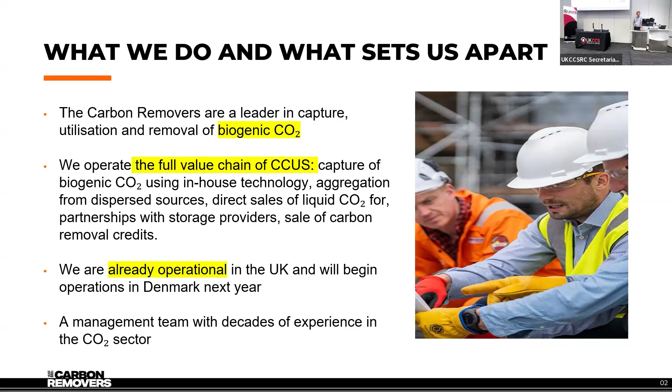Why biogenic CO2 and why only biogenic CO2? Ultimately the distinction is fossil CO2 is an annoying waste product that is taxed or ETS'd, and you have to effectively pay to get rid of. Whereas biogenic CO2, you can make money on either by monetizing the effect that once you've stored it permanently, you can issue a carbon removal credit on the back of the CO2 molecule, or you can use it as a feedstock.

Now we just make feedstocks for dry ice production or for food and beverage companies. But in the future, there will be e-fuels, synthetic fuels, power to X, whatever you call these projects, that also need biogenic CO2 as a feedstock. And I said we only capture from fermentation sources, so only from biomethane or from whiskey distilleries. In theory, the same tech would apply to wastewater treatment plants and to bioethanol. There is no large-scale bioethanol really in the UK, apart from one Nippon Gases plant.

But ultimately, why we focus on this segment boils down to what Jeremy said in the earlier session, thermodynamics rule. What we have to make in order to be able to sell it is 99.9% pure CO2, trace pollutant levels in it, liquid, so minus 20 Celsius plus 17 bar. If we can start with higher purity sources, we spend less money getting the CO2 to that end state.

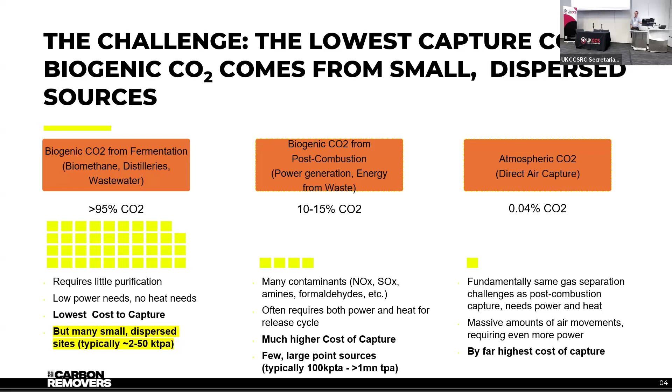So they all just have a pipeline put by some pipeline operator to them. The sources we work with don't have that. So in order to make those sources accessible, you have to physically truck the CO2 from the small sources to your aggregation point. And obviously we do this because the difference in capture cost is so massive between post-combustion and fermentation that we can easily afford all this trucking logistics and the liquefaction and still do it cheaper than capturing more locally.

And then we put two of these isotanks next to one of these units, because one unit basically fills one isotank a day. And then we have a third isotank on a truck that shows up and picks up one isotank's worth of CO2 every day. And the reason why there's two next to each unit and not one is just that in most sites we can't pick up on Sundays. So we need to be able to fill two and then have the truck pick up twice on Monday.

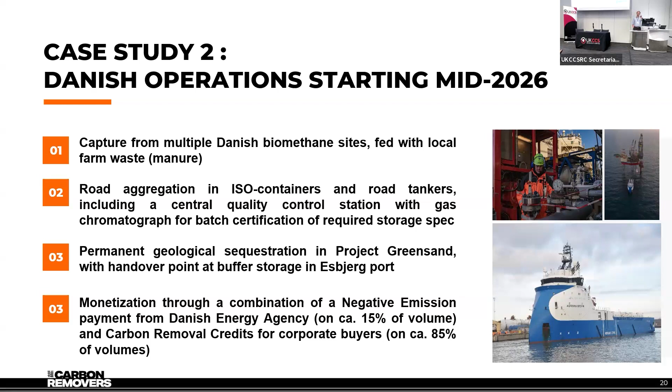So that's what we do in Denmark, starting probably between April and July '26, with 50,000 tons a year. And then the thing that we've learned in Denmark, which our business doesn't do, but we kept getting so many phone calls about it, that we're thinking there's probably a natural extension to our business in a few years there. Now, like I said in the beginning, fermentation CO2 is the lowest hanging fruit in terms of capture cost. But Europe, depending on how you do the maths, only has between 40 and 45 million tons of this fermentation CO2 budget.

Actually, it has less now. But if the EU meets its biomethane growth targets by 2030 and 2035, then the EU plus Britain as a whole would have around 45 million tons of biogenic fermentation CO2 spewed off the back of all this biomethane growth. But depending on what you think of national emission targets, greenhouse gas removal targets, synthetic fuel blending mandates, 45 million tons isn't enough. So Europe will run out of these lowest hanging fruits, and then the next lowest hanging fruits are the post-combustion volumes of BECCS plants or energy from waste.

And we've seen this in Denmark, that there's a lot of energy from waste and biomass district heating sites that are around 2, 3, 4, maybe 500,000 tons that just can't convince anyone to build a pipeline to them. If you're 2, 3, 400,000 tons of CO2, the national grid operator just will not build a pipeline to you, because they're busy building the pipelines to the million-ton stations. So we actually got a few phone calls that said, look, we will help you organize the train. We've worked out that our biomass district heating station is like a train a day effectively of ISO tanks.

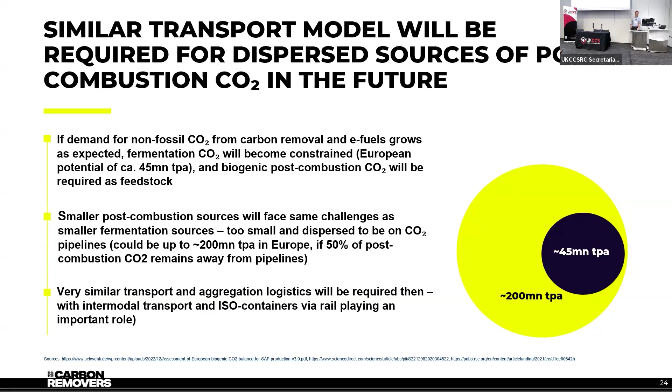We'll help you organize it, but can you just help us practically do this, rent the tanks, lease the tanks, fill the tanks, batch release the stuff, make it show up on time at the storage handover points, etc. We're a small business, we've never had time to do this, and those capture projects never have a business model because the subsidies aren't high enough to allow for the massive costs of post-combustion capture. But it feels like this model will probably play some role in that world too in 5 or 6 years' time, once the world has sorted out how to deal with these 45 million tons.

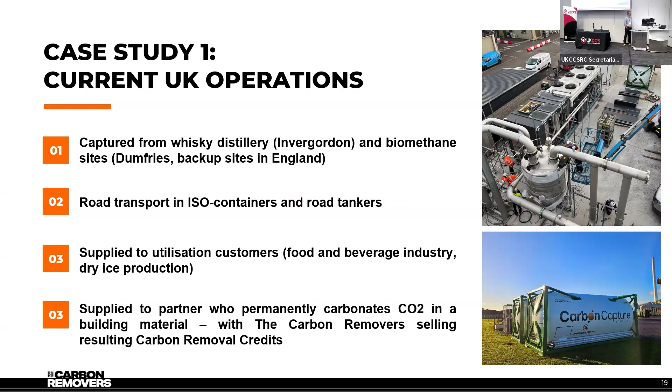Yeah, I'll go back to the very first slide, or to the second slide - ultimately the current utilization market, no one really knows how big it is in the UK. Every time we raise funds, our investors ask us for a market study, and there is none.

About how much utilization CO2 is used - everyone's best guess seems to be around 1 million tons in the UK, probably a bit less. That gives you an idea of what the UK does, and other countries in Europe are similar, just scaled up or down by GDP. So the only way this ever grows to 45 or 200 or any number much bigger than 1 million for the UK is if either of these things grows.

So either people pay for negative emission, greenhouse gas removals, whatever you call it, or people pay for synthetic fuels based on non-fossil CO2 feedstocks. And those two things will only happen if there are compliance schemes that force people doing either of these things. We sell voluntary carbon removal credits, but at a scale of thousands, or maybe tens of thousands per transaction cumulatively over the contract period. So the voluntary market isn't going to get to millions in either of these things.

Yeah, so we have to be patient until the compliance stuff kicks in.

Thank you, and sorry, one other question on the midstream side of things. Do you see any issues with there not being enough supply of things like ISO tanks, if there's lots of companies like yours looking at non-pipeline transport? I'm laughing because I also sit on the non-pipeline transport working group with some of your business colleagues, and there's a lot of industry people there who keep brainstorming about this problem - that there wouldn't be enough capacity and that they need business help to underwrite it, subsidize it, take the asset risk and all this stuff.

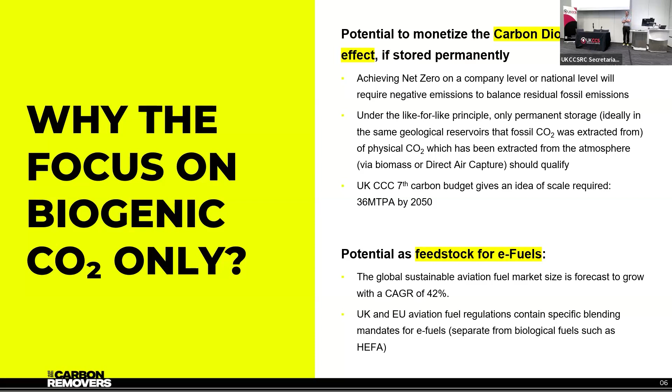I can be honest - what we've seen in Denmark is once some of these contracts were publicized, once we said we've signed storage contracts, once Vincent said we've signed 350,000 tons worth of storage contracts, within 2 weeks we had 3 local SMEs that are road hauliers calling up the contact form of our website saying, look, we are road hauliers, you need CO2 hauled, I'll buy the isotanks, I'll buy the road tankers. If you give me a contract - I think there's enough entrepreneurial spirit out there, especially in the haulage industry, that as soon as people are out there, there will be contracts.

I think if people know the isotank industry better than I do, at the volumes we need to buy isotanks, they're easily available, and to be honest they're not that difficult to make. Once someone wants 15,000 of these things, I'm sure manufacturing capacity will scale up. I think the Danish approach was basically the government just said, make this happen, gave people contracts to make it happen, and the value chain has sorted itself out at a small scale, which worked very well there.

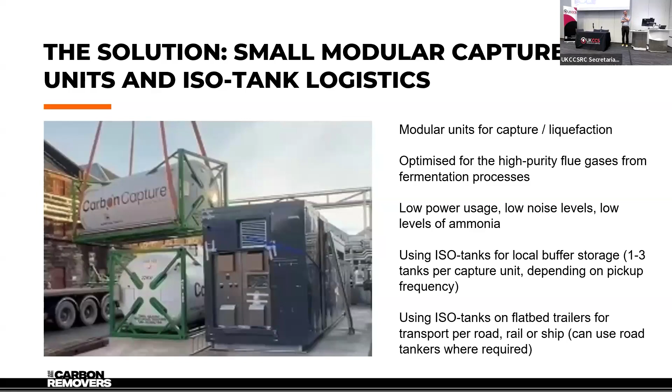So these are funded by the European Commission, about CO2 transport in industrial clusters. And the scope of this presentation first - I will give some very brief background on CO2 transport, most of which probably you are quite familiar with, but then I will move to the challenges and barriers to implementation of CO2 transport as a vital solution for carbon capture, utilization and storage, and then the solutions that we proposed to aid the implementation of CO2 transport in one of the clusters, followed by some summary and future recommendations.

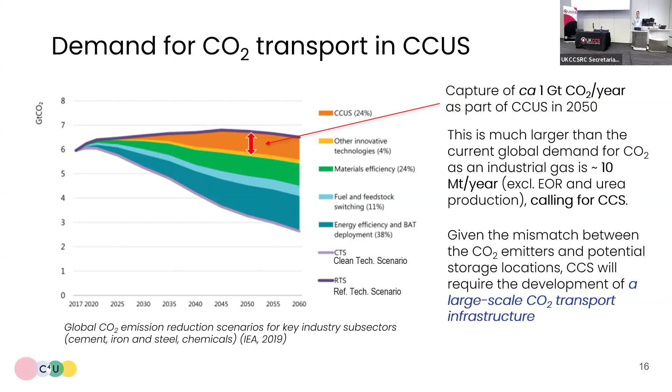So this is what we know quite well, the good, and obviously this is the challenge. Well, we need to have that transport, those transport solutions.

The good news is that CO2 transport is considered a mature technology, and we have several modes of CO2 transportation. These include pipelines or other mobile modes of transport using road transport, railway transport, ships and barges, and they all come with some advantages and disadvantages.

Some of them I have listed here based on the literature. Particularly, pipelines are considered the most suitable economic mode of transport of CO2 over long distances and large amounts, but they come at a high upfront capital cost. For small amounts, and depending on the availability of infrastructure in terms of roads or waterways, we can go for other modalities of transport.

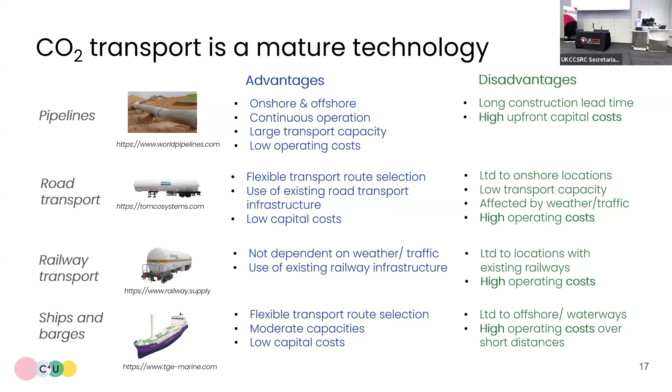They offer more flexibility, less upfront cost for implementation, but operating costs can be quite high, and we can compare the different modes depending on specific needs, amounts that need to be transported, and distances that CO2 needs to be transported.

Here basically comes the challenge: how to decide on the exact specific mode of transport, especially if we are talking about several emitters and several options where CO2 may need to be transported either for storage or for utilization.

How these transport modes' capacities can be estimated, or there is the economic side, and cost benefit analysis that needs to be done. Efficiency of the operation is another challenge.

There are, of course, safety risks that also need to be considered, given the safety issues with CO2 itself as an asphyxiant, and also some impurities that can be detrimental to CO2 transport facilities, may cause corrosion issues, or can be hazardous on their own.

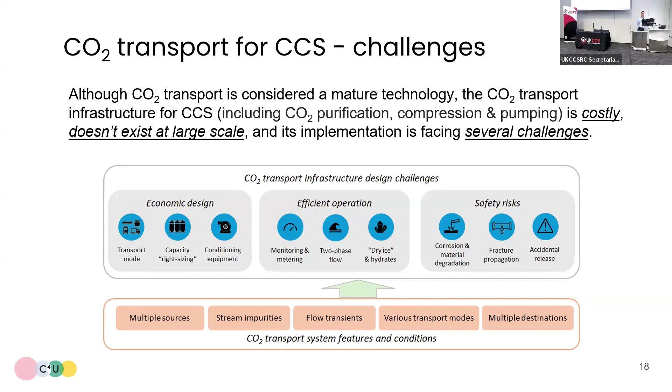Apart from these design, operation, and technical challenges, there are also other non-economic challenges posed by the environmental impacts, for example, of CO2 transport when it comes to using mobile modes of transport that operate on fossil fuels.

There are issues with potentially the policies and regulations when it comes to obtaining permits for transport, cross-border transport issues, resolving financial liabilities, long investment cycle for CCS projects, and uncertainties of the ownership of CO2 transport infrastructure.

There can be differences in the stakeholders' agenda when it comes to, for example, implementation of CCS in cluster regions, where the emitters would like to join at different times. They may wish to pull out at different times as well from the projects, and they may have their own decarbonization agenda when they implement other measures to reduce their carbon emissions.

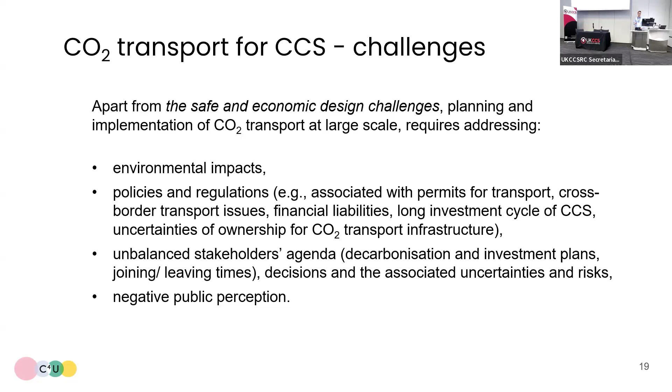And of course, the aspect of public perception. This can also be detrimental to the project if there is strong opposition to CO2 transport infrastructure implementation.

One of the solutions you're probably now aware of is reducing the cost by clustering CO2 emitters. This brings the benefits of reducing the cost, reducing the initial investments, and reducing the risks to the project implementation.

There are a number of such projects proposed in the UK. There is a project that we're working on in terms of the research infrastructure, in terms of the transport infrastructure research at the border of Netherlands and Belgium in the North Seaport.

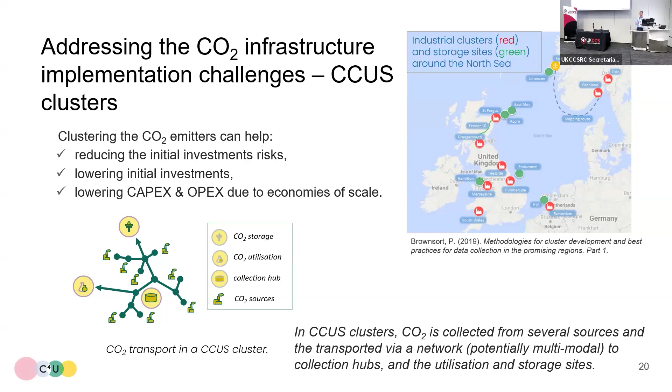In such clusters, CO2 transport facilities need to be decided and planned in terms of rollout over a number of years, and it can be applied to clusters or to larger regions.

There are several optimization problems that have been studied to address this infrastructure design. Typically, people looked in the past at the design of CO2 transport networks, pipeline networks, to connect several emitters and to transport CO2, for example, to geological storage. These studies were done around Europe and other regions around the world.

There are also studies where the cost-optimal modes of transport are investigated, for example, for CO2 transport chains, when you collect CO2 from a number of sources and transport it to dedicated storage using pipelines, trucks, railway, ships, and barges.

There are also studies where, apart from cost criteria, other criteria were included in the multi-criteria decision analysis to figure out what network configuration or transport infrastructure solution to go for. These can be safety considerations, for example, or environmental impact. So people have studied that as well.

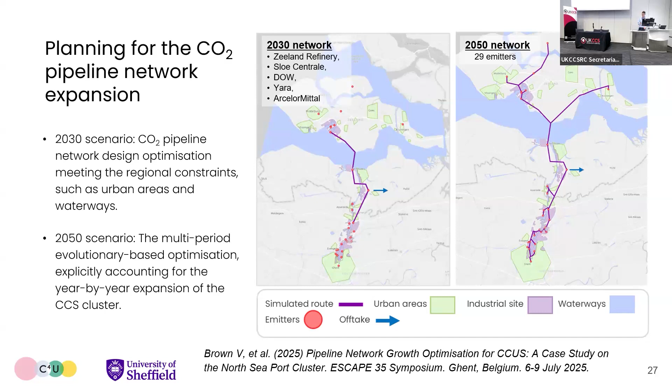And they have done that by explicitly taking into account the times when these emitters are planning to join. So assumptions were made, partially in consultation with industries, about when this may happen, and they have predicted what the evolved network configuration will be. So they have developed a really nice tool, which is close to commercial implementation really.

So in summary, I would just repeat that choosing the optimal CO2 transport solutions requires balancing costs against other criteria, and this could include geographical constraints, safety, societal acceptance, environmental impacts, and the speed of deployment.

And in our project, we have developed tools and methods that enable us to predict the infrastructure for CO2 transport, including right sizing of such a network, planning the future expansion of CO2 transport networks, and also we have the opportunity to do the multi-criteria optimization of such networks, including not only cost, but other criteria such as, for example, environmental impacts.

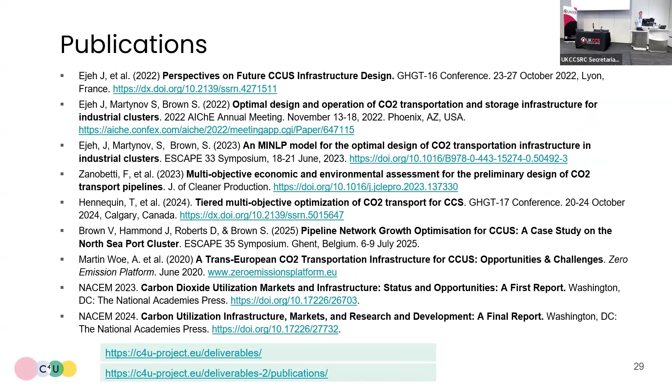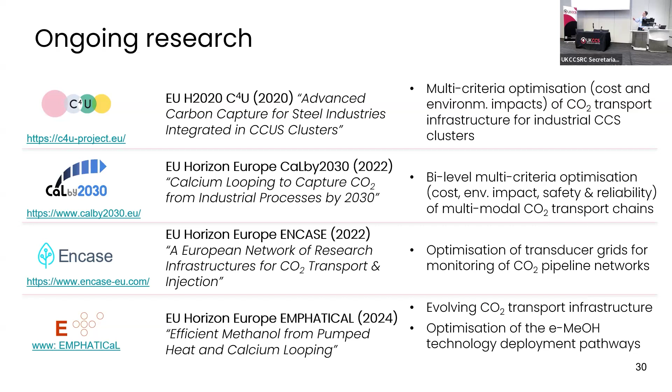We have produced a list of publications that you can access through these presentation slides, and we have several publications and deliverables made available through the project website, and we partially continue this work in several other projects, CaLby2030 project and ENCASE project, and there we look also at optimizing monitoring systems for CO2 transport networks, and also evolving CO2 transport infrastructure for producing green methanol in the EMPHATICAL project.

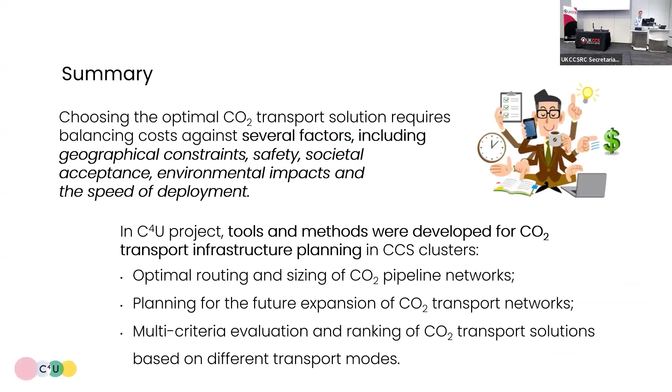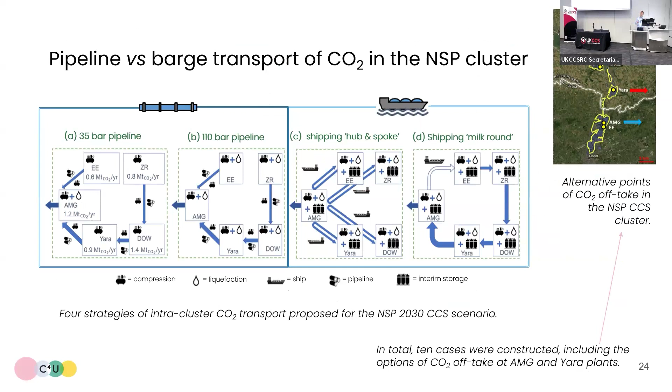Yes, I guess you're referring to this slide, is that right? This one. Yes. Here, for example, you just only have targeting 1.2 Mt CO2 per year for scenario A. Is it the same for all of them? Yeah, we have made the assumption that we are capturing exactly the same amount of CO2 from the emitters in the cluster. So that's cost analysis for all of them? Yes, we have done the cost analysis for all of them. Can you describe which ones can be implemented?

Yes, in terms of the cost analysis, for example, here we have the results for 8 scenarios, and we have pipeline scenarios as shown here for the 35 bar transport and for the 110 bar pipeline transport, with the offtake at 2 different alternative points, so that's why there are 2 here. And we've had shipping scenarios, so this included milk round and also hub and spoke, when you are transporting individually from the emitters to the dedicated collection point.

And in terms of the cost, we have the budgets for the cost in the top here. So there are CapEx and OpEx, and in fact, in this plot they're not really split as CapEx and OpEx. In the full paper, which was presented in the conference last year, you can find results for CapEx and OpEx, but here they are just

enumerated costs, but you can see the cost of liquefaction and compression contributing quite a lot, but the cost for the pipeline, the CapEx cost here, is relatively small, and the cost of shipping, that's the tonnage cost. Given the small distances, this cost is comparatively high to the pipeline cost in the project in that area. So it's a small distance, like a 30 kilometer span. So that's fine.

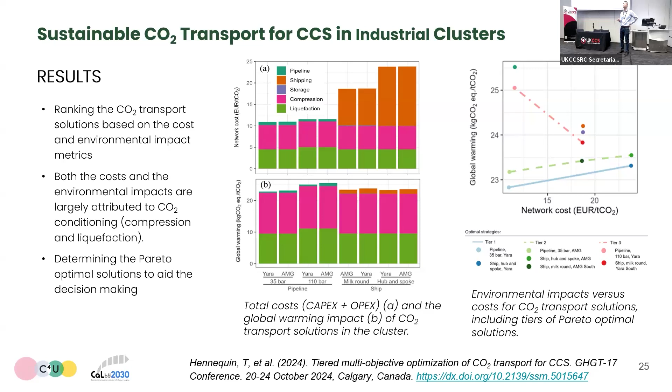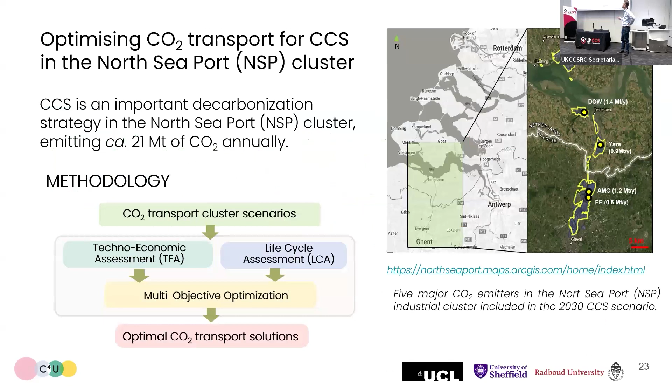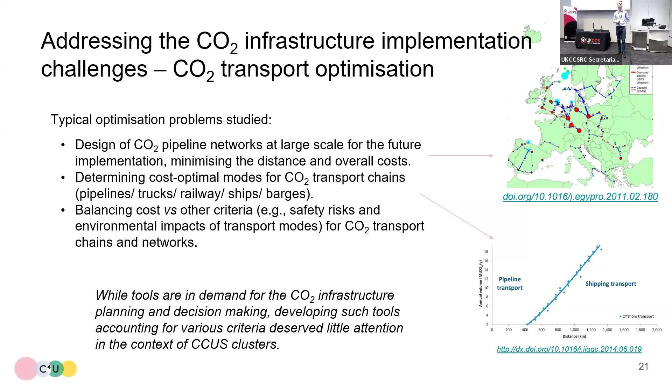Hello, everyone. Good afternoon. My name is Joseph Rainey. I'm here to give you a very high level overview of the various products Chart Industries / Howden offer to the CCUS market. I'm the last speaker of today, and I think I've got 10 minutes to wrap up here. I'm also standing in the way of a nice refreshment for you all, so I'll try to keep this as brief as possible.

For those of you not familiar, Howden is a Scottish company headquartered here in Glasgow since 1854. James Howden, the founder, did a lot of early work. He developed the forced draft system, which made boilers more efficient, which allowed steamships to cross the Atlantic. Since then, we've grown considerably, and so did our range of products, mainly rotating equipment: fans, compressors, heat exchangers.

Howden was a Scottish company. Very recently, in 2023, we were acquired by a large American company called Chart Industries. Both companies had about 6,000 employees. So we came together, and we like to use the word synergies. Both companies were selling into each other and offered complementary products. So now we have 115 global locations and 12,000 employees.

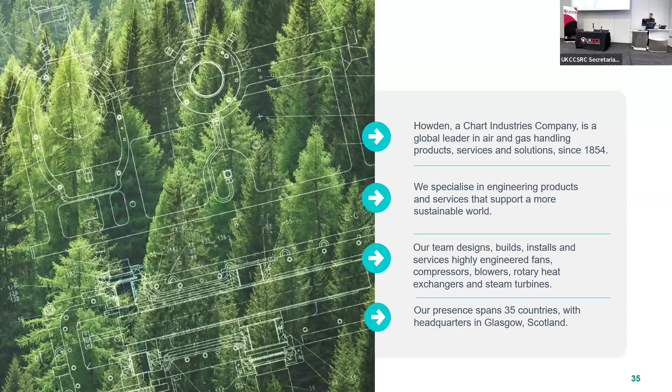It's a vast array of products, and I am still learning them all. Sometimes I go to events like this and somebody educates me on stuff we actually make. But we have various products, including for the CCUS markets, and we're just going to talk you through some of them.

So we have here, this is just a sort of slide which is showing you 4 of the main brands, because when we usually acquire companies, or in this case, Chart acquires us, we like to keep the branding because it has a lot of recognition. So in the CCUS market, the 4 main brands which we have are Earthly Labs, which is sort of smaller scale, started in breweries, but I'm going to talk about that later.

We have SES, Sustainable Energy Solutions, which is a carbon capture technology. We have the legacy Howden, which is all the rotating equipment and mostly used in the transportation if we're going through pipelines. And we have legacy Chart, which is like tanks and stuff, but we'll cover those in more detail.

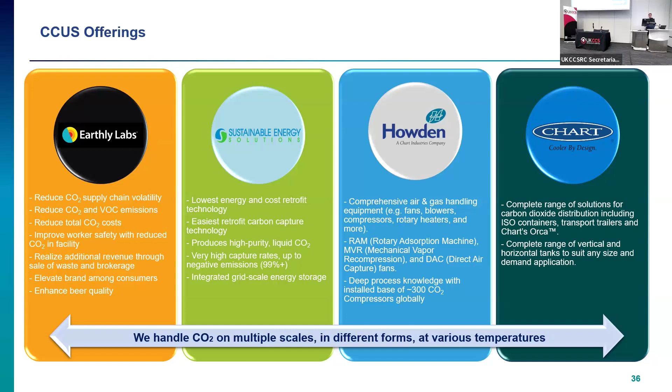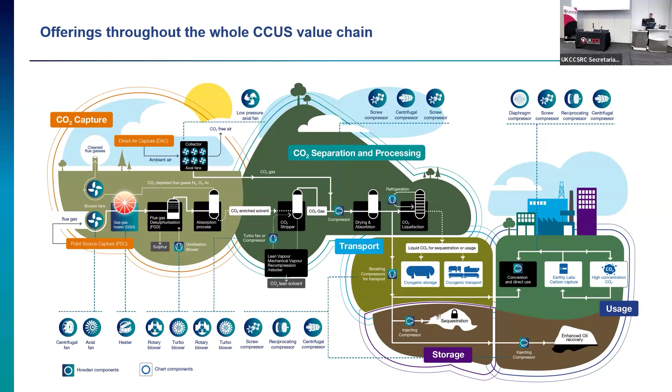So if we do a wee bit of a deeper dive into the legacy Howden products, we'll see here at point source capture, there are large centrifugal fans, axial fans, rotary heaters, blowers. For direct air capture, we have fans and the rotary adsorption machine. I'll come on to that in a second. And then during the separation process, we have the compressors, various types of compressors and blowers. And then when we get to transport and storage, again, larger compressors, larger pressures with big recips and screws and diaphragms.

The RAM here is interesting in the direct air capture, because all these other products are used in various industries and various gases, but the RAM was specifically made for carbon capture. It is based on one of our other technologies. You'll see the gas heater at the point source capture. It's the same graphic, but it's an adsorption, swing adsorption, where you have the gas stream going up, and it rotates round, goes into an adsorber, and then is released on the other side of the heater.

And I can't say too much about it, unfortunately, because we're covered by NDA, but it is something which we see major growth for. We've been working on it since 2011. And we had some hurdles at the start because the initial adsorbents weren't effective enough, but now we have a very large partner who's very invested in it. And we have had a working prototype since 2023. So that's something which we are quite excited about.

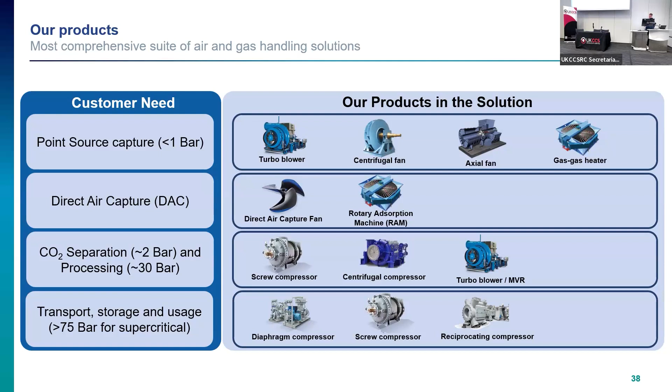Again, continuing with the rotating equipment, it's just a slide to show the breadth of products we have and the various flows and pressures that they go up to. Basically, I don't want to turn this into a sales speech, but just know that if there is a need for any rotating equipment, it's always something that we're going to have a solution for eventually.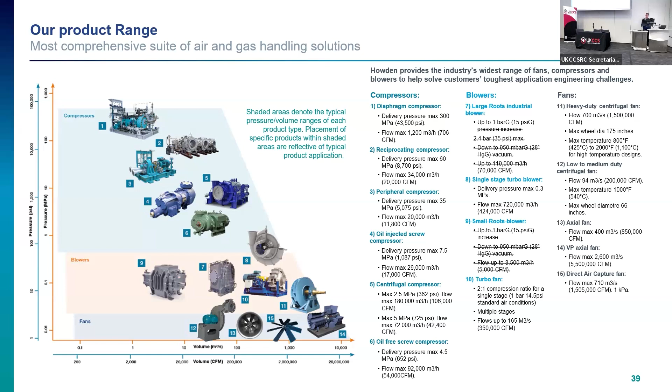Okay, and another piece of rotating equipment here, which plays a very important part, is a rotary gas heater. So we've seen these before in the FGD plants, where it basically takes untreated gas, cools it down, allows it to go through the treatment process, and then reheats it as it goes up the stack. So we are seeing these applications and inquiries for carbon capture plants.

You'll see there on the picture down at the bottom, that is what it would look like without this. If you're using a wet stack, you see a very visible plume, and then the picture in the middle is actually Drax with one of these heaters installed, where you cannot see the treated gas coming out the high stack.

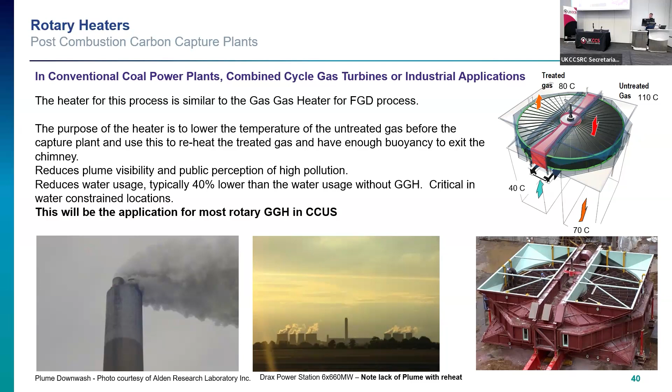And why we find this important is because we have a demonstration plant in Japan which is actually using this technology on carbon capture. You'll see there, encircled in the middle, is a small demonstration plant here. It has a booster fan there in the B position. So any gas or leakage which comes through is actually treated gas, which then gets pulled in and sent through the process again. So we're not putting anything nasty up there.

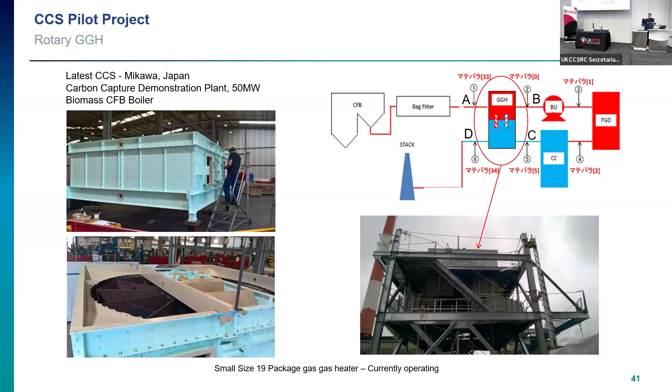And if I move on, this is just to show that we also do the fans and the blowers for those applications, because we've done them in FGD. It's just to show they are quite arduous depending on where they are in that process, but we always have a solution, and so they are there with live references in the field.

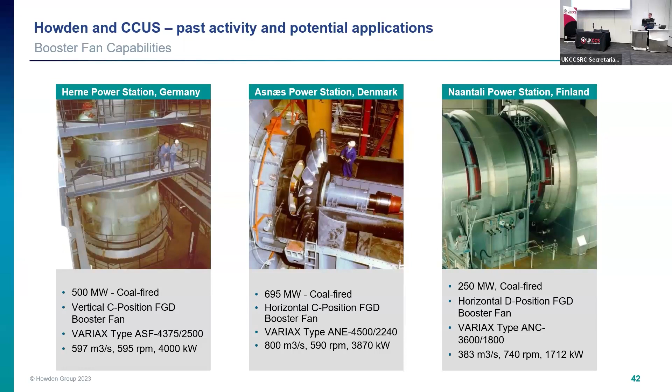And talking about references, here are some actual carbon capture projects which we have supplied products into. And not only actual live projects, we're always involved in various FEEDs, pre-FEEDs. And for about the last 15 years, we're just continuing to support all the various projects which we see. So that is basically the Howden rotating equipment products.

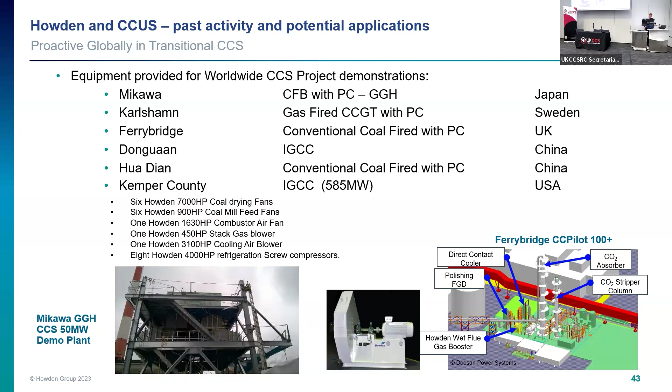I'll now very quickly take you through some of the Chart ones. Again, so this is a Chart company, SES, which actually captures the CO2 rather than just a product which is supplied into a certain plant. It's not amine solution, which I suppose most of you here are familiar with. It actually cools and compresses the CO2 into a solid, separates it, and then reheats it into liquid format.

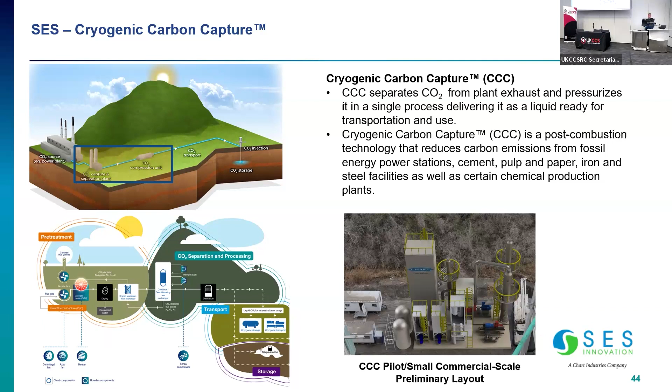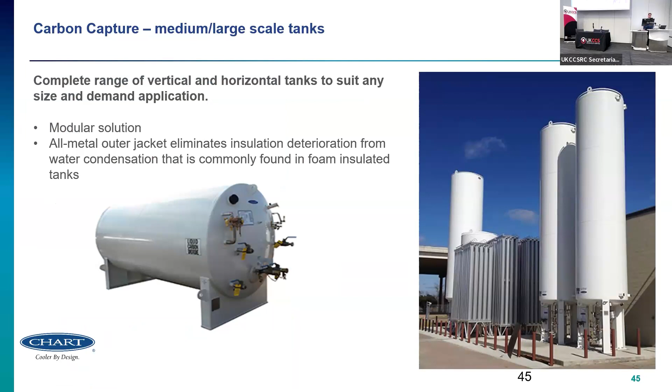And then, as we were talking about earlier, all the tanks. So Chart is very big into cryotechnology, and it's a very large tank manufacturer. So they do multiple sizes of vertical, horizontal tanks to suit any size and demand. And they have a metal outer jacket, so they've not got any foam insulation in there. They do without that. Into some transport pieces, they also have the ISO containers. They have them on trailers, and they're also looking at and can do the railroad trailers as well.

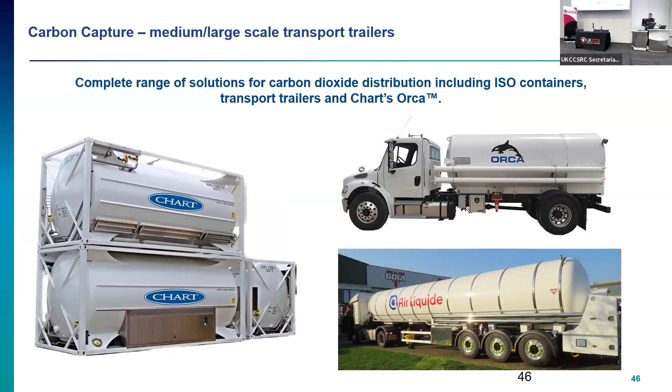Now, I'm just coming to the end, but since you're all going for a drink, I just wanted to touch on Earthly Labs, which was a product which was started off in the States, and it takes CO2 from breweries, and it captures that CO2. Again, as we were talking about, it's a high concentration point of CO2. It takes that and it treats it. It then compresses it, it dries it, it treats it some more, turns it into liquid CO2, and then that brewery can reuse that CO2 later on in the process.

So we talk about the environment, how it's great for the environment, and these breweries love to promote that, but the real reason they do it is money, because you've got an ROI of typically about 2 to 3 years for a situation like that, depending on the volumes you're going through.

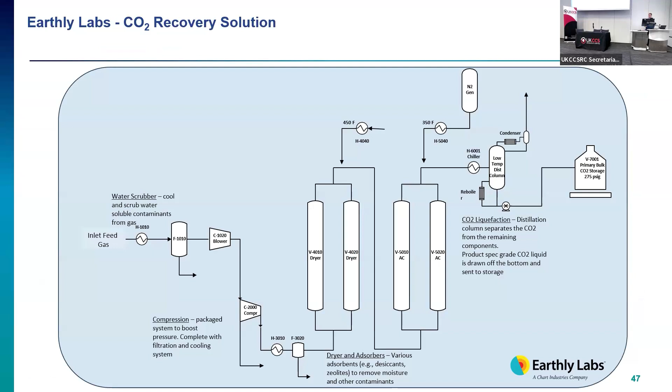In the last slide, what's the minimum temperature you go to when liquefying CO2? Pardon? What's the minimum temperature? Here. What temperature do you go to in that low temperature? I'm not sure. It depends on the pressure they're at as well, but I'm not sure of the exact temperature, but probably around about minus 15 to minus 20, depending on the pressure they're hitting. Yes, and there you'll see the tank there. That's a liquid tank.

Question? Yep. If you consider applying all your technologies to processing certain amounts of CO2, compression for example, if you use several units versus just going for a big unit, are there significant economies of scale there because of less material use?

Yes, certainly. So very typically, Howden has always been about the larger projects. So all our compressors are for the bigger scale. We don't really work at the smaller end. There are so many other suppliers that we're not as competitive, but in the bigger end, that's where we come into our own, and definitely that's where the economies of scale come in. It all depends on the customer and how much redundancy they want. But yeah, the fewer machines you have, the far more economical it's going to be.